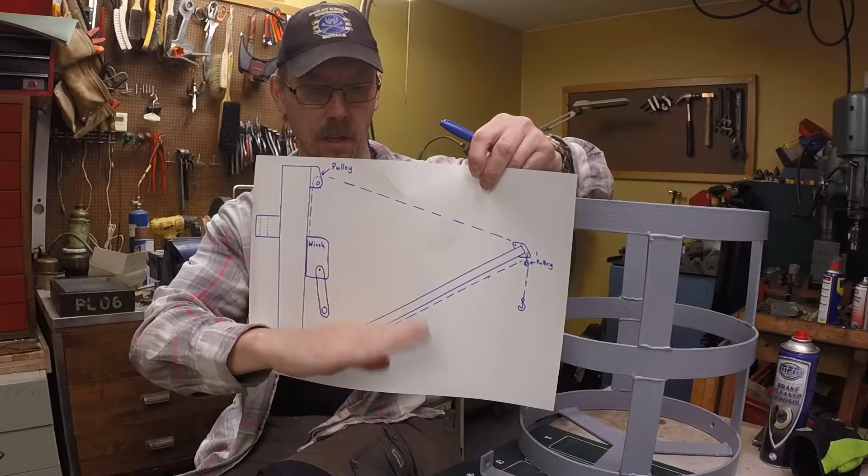This is the side that mounts the boat, so it can pivot from side to side. And this is a riser. It is higher than the one that's there today. It will have a winch, pull this, and the wire will go this way. So in this crane, the arm can be tilted, raised and lowered, thus this point will move in that direction also.

So I can make a lift right close and 3 meters, 10 feet out if I want to. This I think will be a great improvement. So today we will start making the boom. We will make this end of the boom, the lower part. It will have some sort of, I don't know the word, but bushing in this end where the axle fits, and I will make a taper down to that size. And that involves some lathe work and some welding. That's nice.

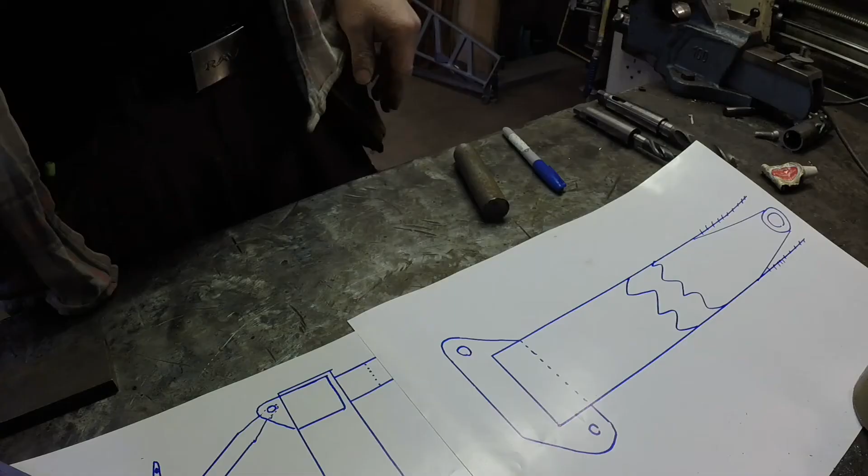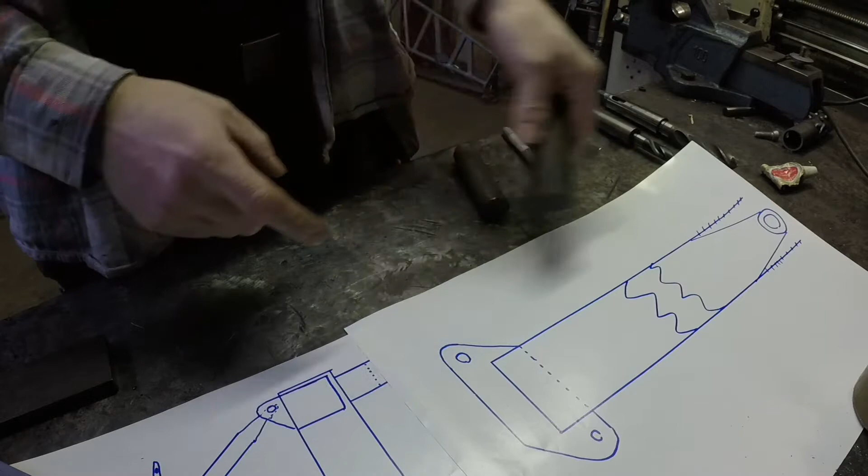Well, now I gathered some material here. And this piece will be the bushing, if I may call it that. I will saw it off at 43 millimeters, then turn it down in the lathe to 41. And I will drill a 20 millimeter hole there for the axle itself, which will be made out of this sad piece. So this will be the axle. Can you see that? Almost.

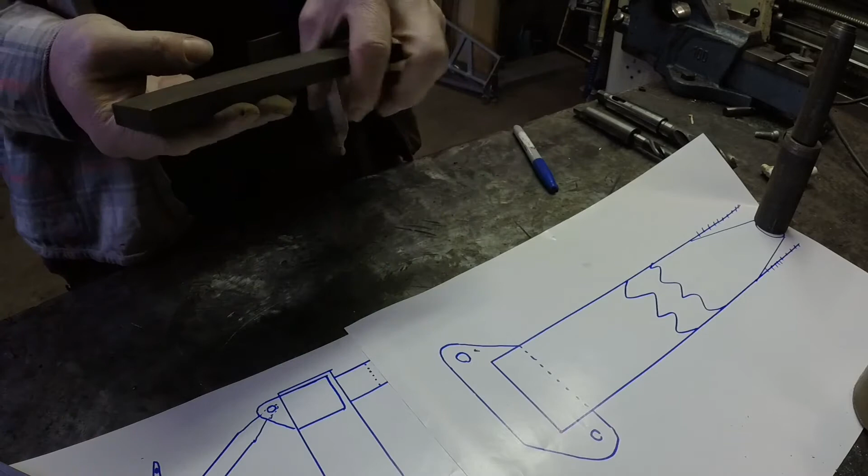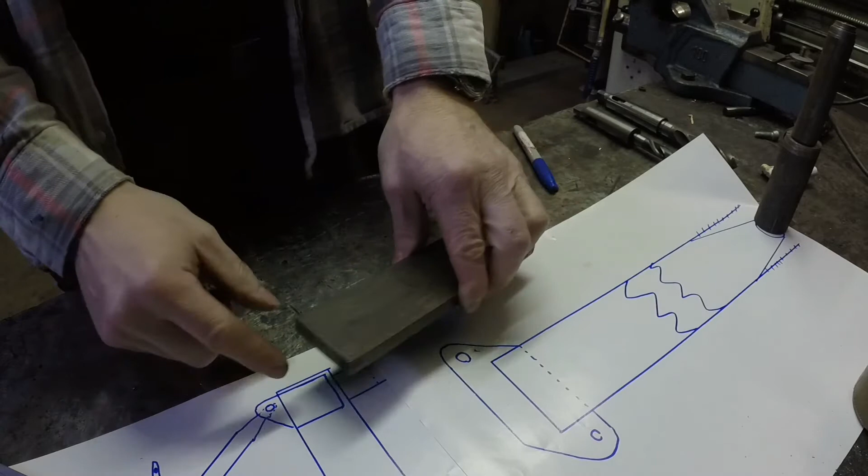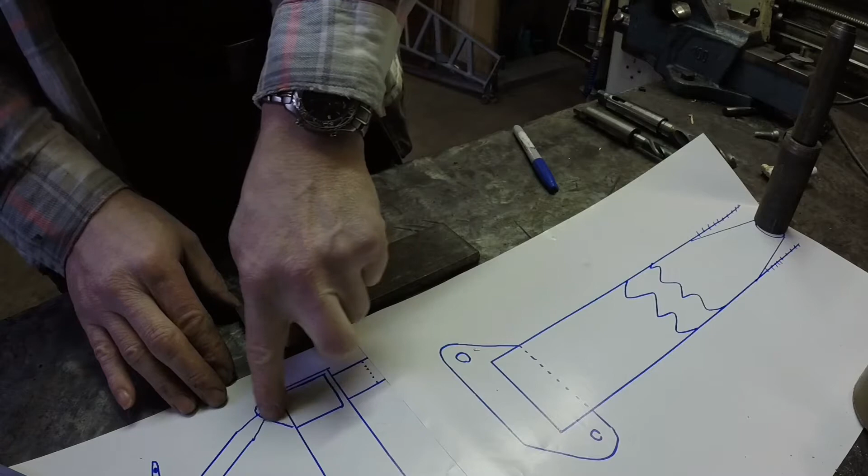This piece, also from the scrap heap, will be that plate down here that will be mounted, one on each side, to hold the crane. I think it's nice that it is thick material. So that will be cut in half, 20 millimeter hole drilled, and then an elegant taper here in some nice fashion. I'll get back to that.

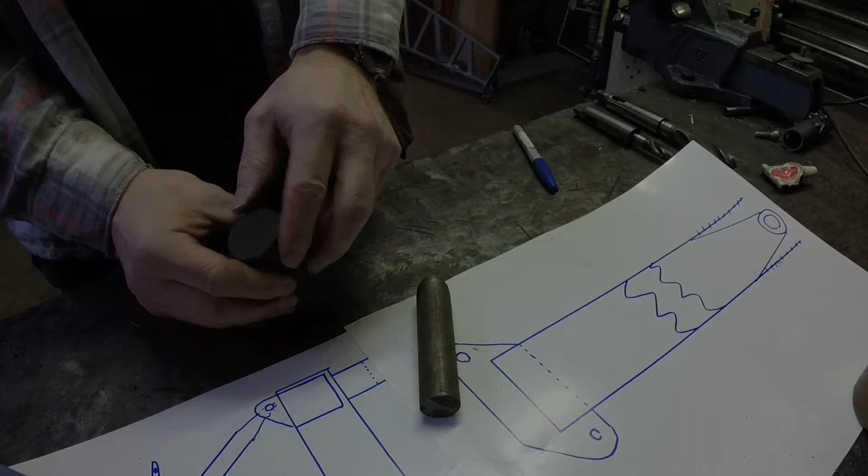So, first things first, and I can easily part it with a parting blade. It won't be that much material left. This is, I think, 35 millimeters. So that will be 7.5 millimeters on each side. That won't be much. To the lathe.

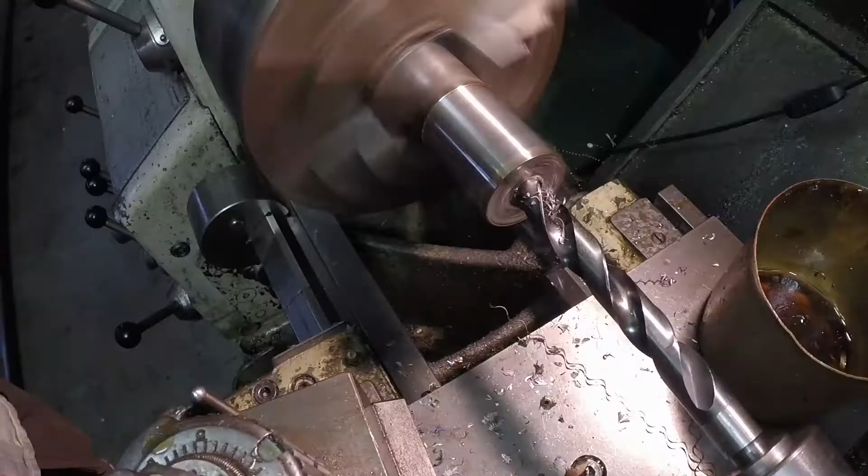Plenty enough. And that also left a really nice finish. Since this is only a piece of a crane, I won't turn it down anymore. Just to clean it up, that's good enough. So the next thing is to drill it. I just center drilled it, and now I'm drilling it with a 12mm drill.

This material I chose is probably a very nice steel. It's very hard to drill.

Let's take the 20mm drill and slow the speed down to 180. This will sound bad, I think.

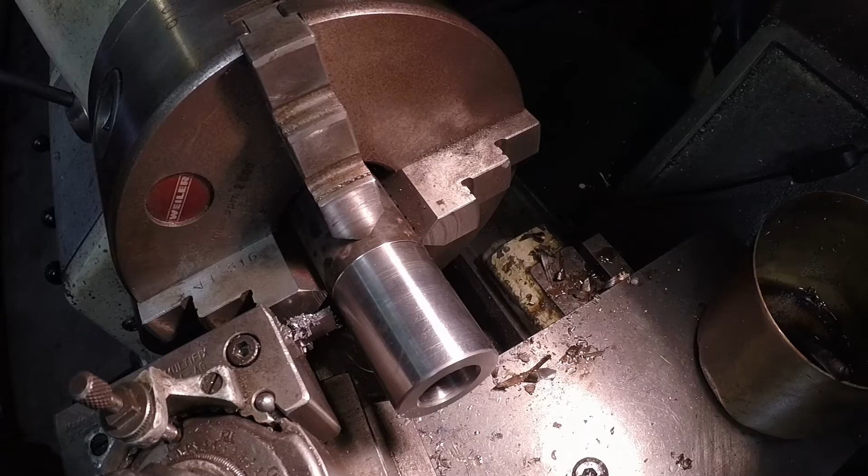That's nice. Now it's time to part it off. This blade is 3mm and we should part it off at 43mm. So let's reset our digital readout and move 46mm. About that.

Should I do this on the power feed? Yeah, I think I will. Chips like this aren't enjoyable really. I will hand feed the rest.

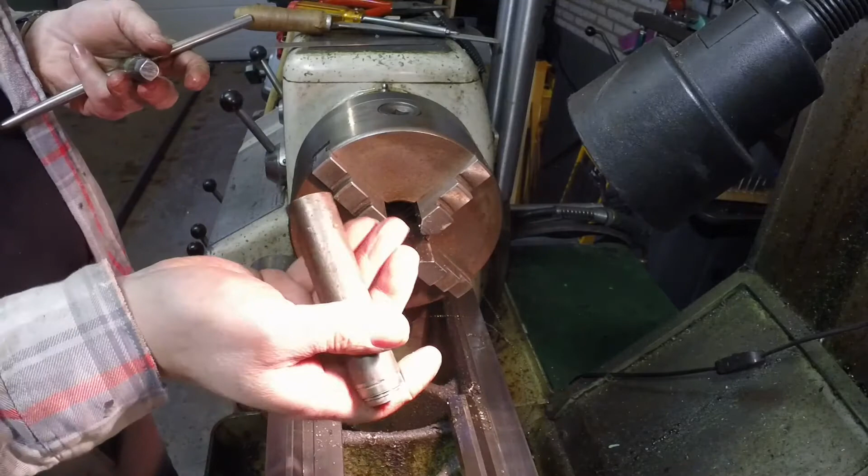So the bushing is done. Now it's time for the axle. It will be 20 millimeters wide, 77 millimeters long, and then have a head in the end.

Just double check. Is this 20 millimeters? No, it is not. The first step is not 20. The next step is. So a bit out. Now it is possible to turn a 20 millimeter shaft, and I have to face these 3 millimeters off at start.

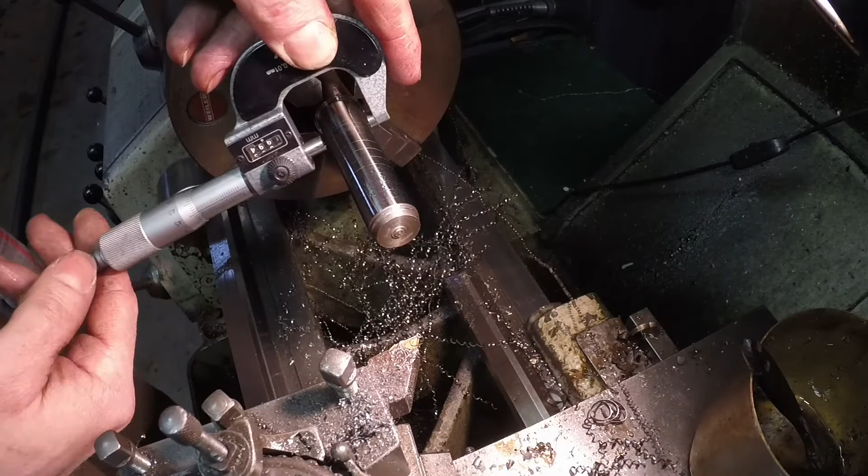The drilled hole is about 19.8, 19.9. So I will match this axle to fit the drilled hole, since we will drill with the same drill in the two side plates. .48. Yep, 21.48.

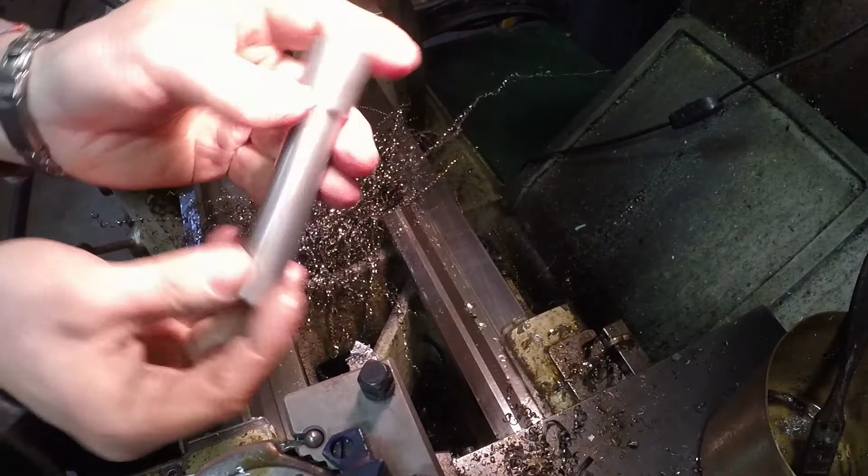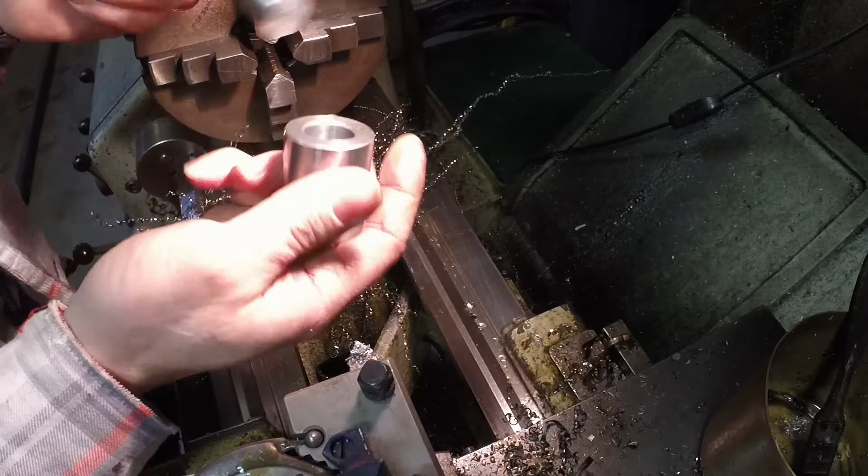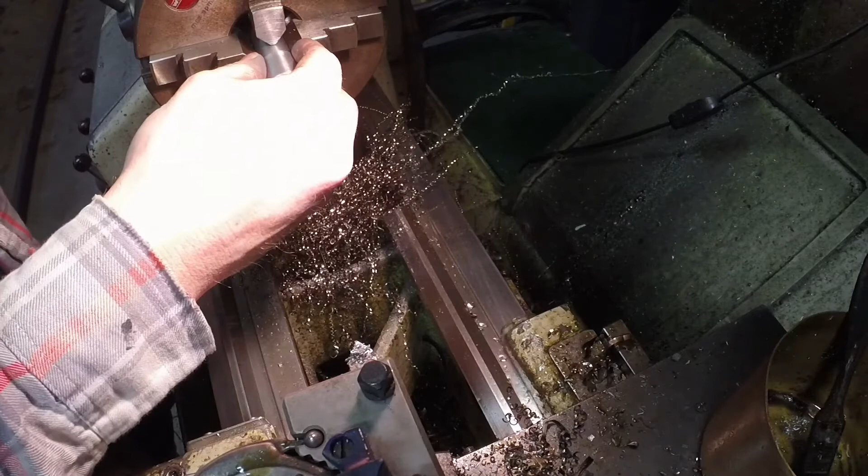I think this will distort some when we weld this, but again, I made it fit. Made this pin fit, the axle fit everything that the drill drills, so the drill can easily drill that again. That is done. I just felt that it was a sharp corner here. Just give it a slight chamfer with a file. That's all it took. That's nice.

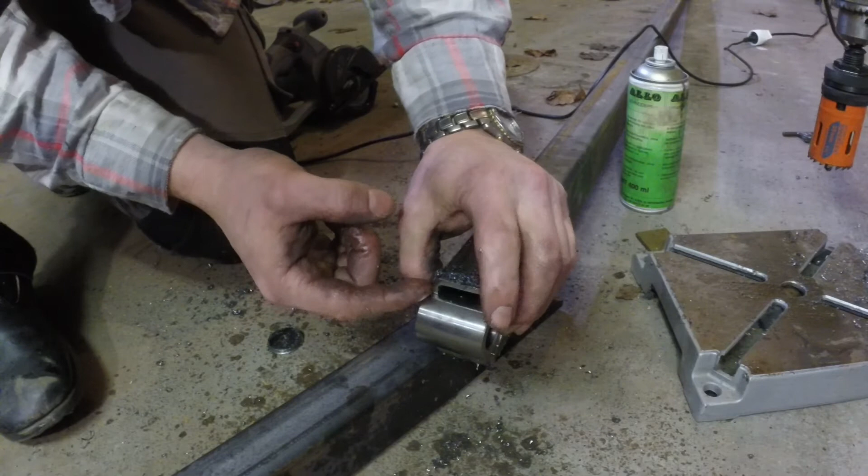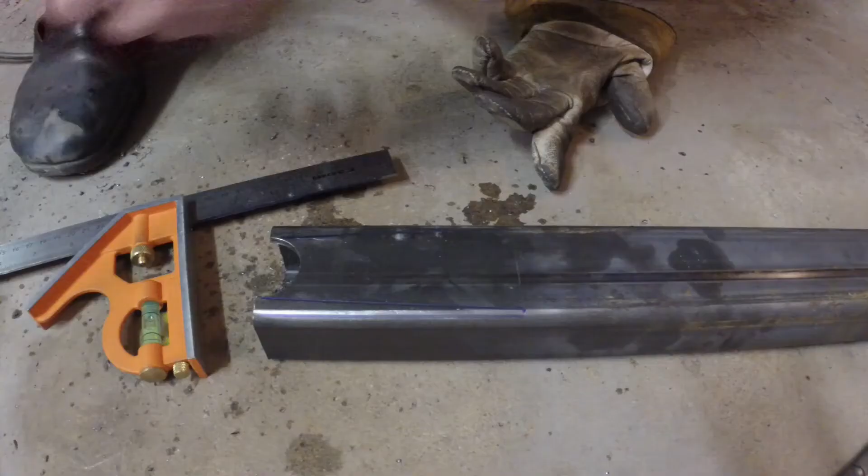My plan was to remove material so that this can be welded straight onto the bushing here. So I don't think there is a shortcut. You need to do this. Now I marked here with a blue Sharpie where I should cut out a piece, a triangular shape here, and then I can turn this to make the tapered form here.

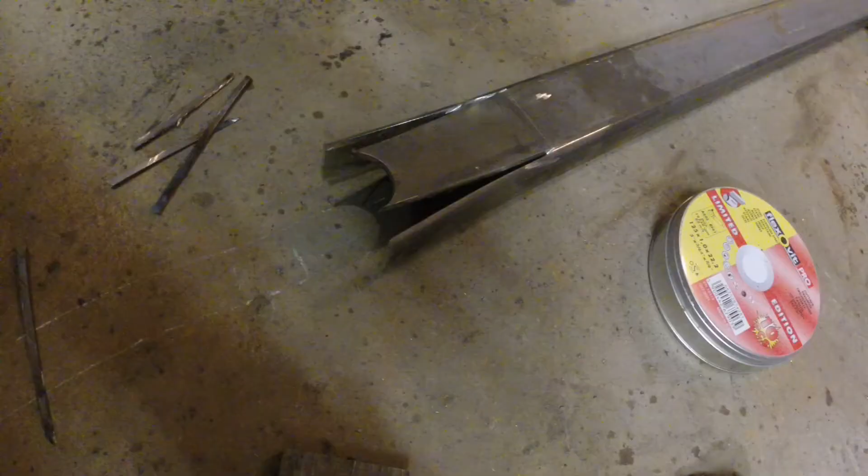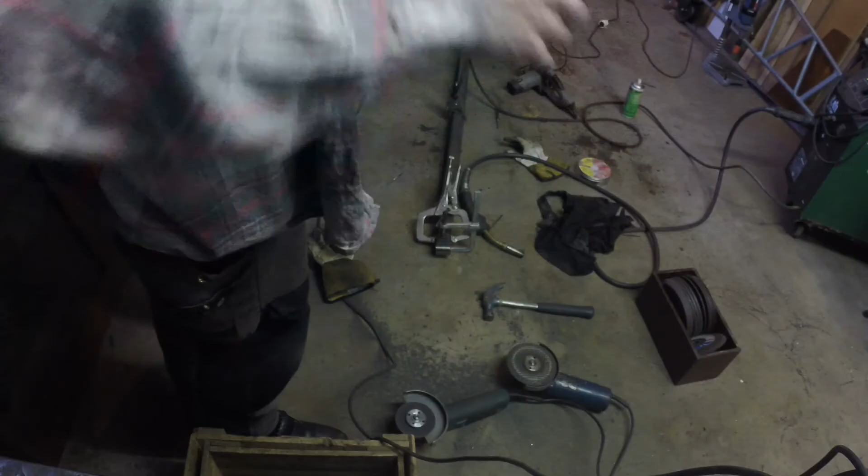Cutting is done, and it is rather interesting to see how they just bend apart. Well, the next step is welding it back, and welding the bushing in place. Well, as you see, I've just started to assemble this piece and did some tacks that keep the bushing in place, and now it's time to complete the welding then.

The welding is done, and I have ground it off. I think it's turned out real nice, and actually the pin still fits. That's extremely nice. So this end is done.